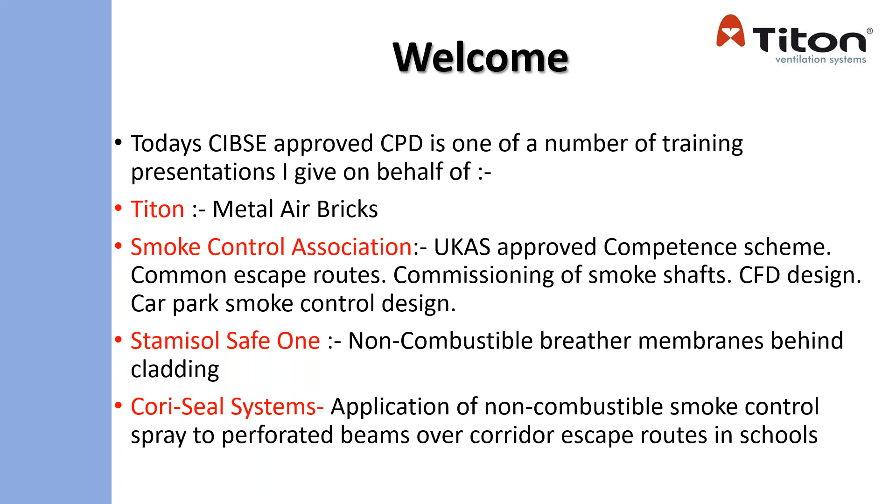Welcome to this CIBSE approved CPD. It is one of a number of training presentations that I give on behalf of companies such as Titon on metal air bricks, which we'll be going through today, the Smoke Control Association, which is on the UKAS approved competence scheme for companies, as mentioned before, one on common escape routes, commissioning of smoke shafts, CFD design, and car park smoke control designs, together with a company called Stamisol on the first non-combustible breather membranes behind cladding, which is obviously a flavour of the day. And finally, there's another one called Cori-Seal Systems, which is the application of non-combustible smoke control spray to the perforated beams that may be over corridor escape routes where smoke plugs have been missed to be fitted. So I do now have a number of these presentations that I'm quite happy to give to the membership if you do the request. Thank you.

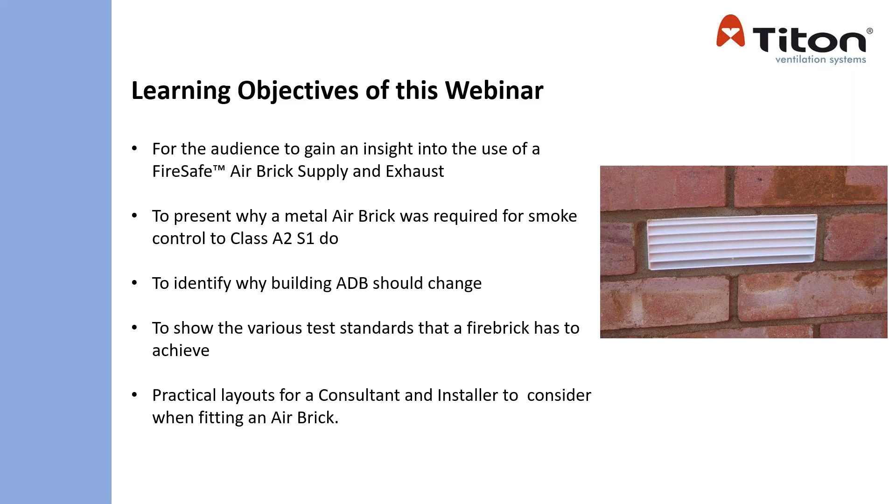So what are we doing today? The learning objective is to give you an insight into the use of metal air bricks over plastic air bricks, at times for both supply and exhaust within a building for various products that are used. And therefore, that's to show why a metal air brick is now required for smoke control to a class A2 S1DO over the plastic scenario. Then to talk about why the building's approved document B should now be changed to actually only specify metal air bricks in buildings. And then I'll show you the various test standards that a fire brick has to go through, and then practical layouts of how the brick to ducting go through and for consideration to be taken place.

So what we're talking about is obviously a new concept in fire safety on the outside of a building rather than on the inside. Therefore, it is no longer acceptable to say, I didn't know, it was too expensive, it was not in the building regs, so I didn't change it, etc.

Dame Judith Hackitt has made it very clear we should be doing the right thing now and not wait for legislation. The lives of residents in buildings must always be considered when designing and developing a building, from the fitting of sprinklers, smoke control systems, fire doors, and fire alarms, all the way down to simple things like the installation of metal air bricks in a cavity wall.

Because any product that has the potential of catching fire can give off toxic smoke and hot droplets, and therefore is not acceptable. It's not just the safety of the building occupants that has to be considered, but also the safety of the fire crews as well.

An outer wall system of brickwork, thermal blocks, membranes, cladding, cavity, and the air brick are all part of what is considered the vertical wall system. Practically, they should achieve what is known as the Class A2 standard from the damp course upwards.

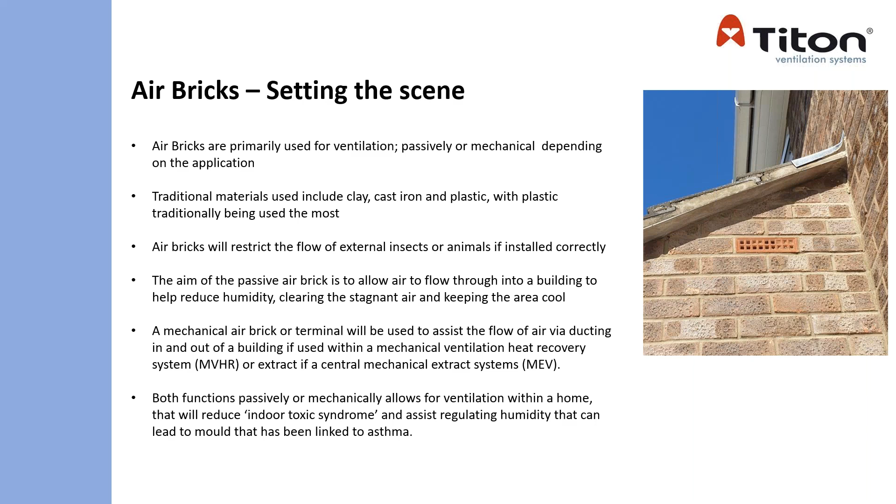So what are air bricks? What is an air brick? And what is its role in the outer wall system?

These are used in conjunction with mechanical vent systems, which require supply and extract terminals through the external facade of the building. Class E, Class F and even Class B are combustible materials, and therefore they can catch fire and give off toxic fumes and hot droplets.

If metal air bricks are made of a metal which is an A1 class, and powder coated for rust protection, then they will meet approved document B and the desire for a Class A2 specification.

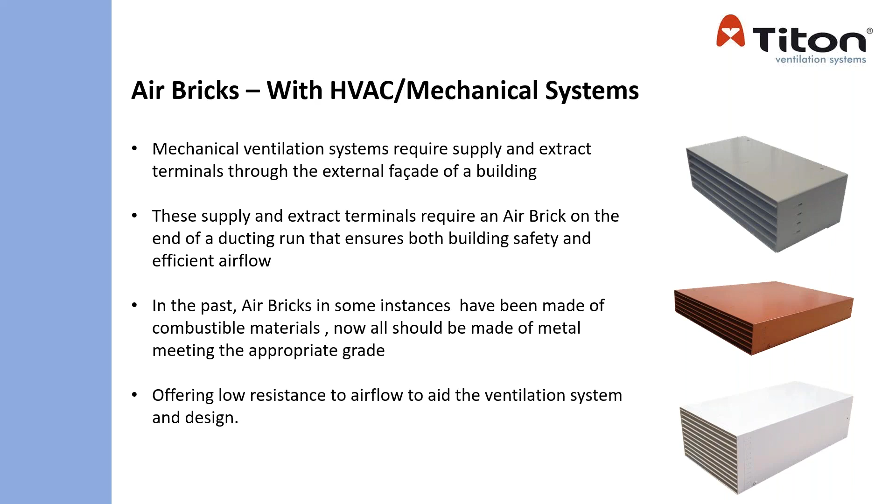Metal air bricks, if designed and manufactured correctly, not only add a fire safety feature to a building, but will also give good, low resistance to the required airflow. Therefore, they can become a positive aid to the ventilation system and the building design.

As mentioned, the development of a metal air brick took place following the Grenfell Tower tragedy, when it became clear that meeting the requirements of approved document B for a Class A2 external wall system was paramount.

The Grenfell fire raised many concerns, especially the importance of fire safety improvements in meeting building regs. Combustible materials that make up the external fabric of a building, such as an air brick, would, after the Dame Judith Hackitt report, have to be redesigned with a change of class.

This is because low price products which are combustible should no longer be the driver in pricing. This should always be about life safety.

That could imply that a product classed as combustible could still be allowed to be installed into certain building heights and therefore still fitted to the outside of the building. So that raises questions about improving safety at lower heights for any building where people occupy premises day and night.

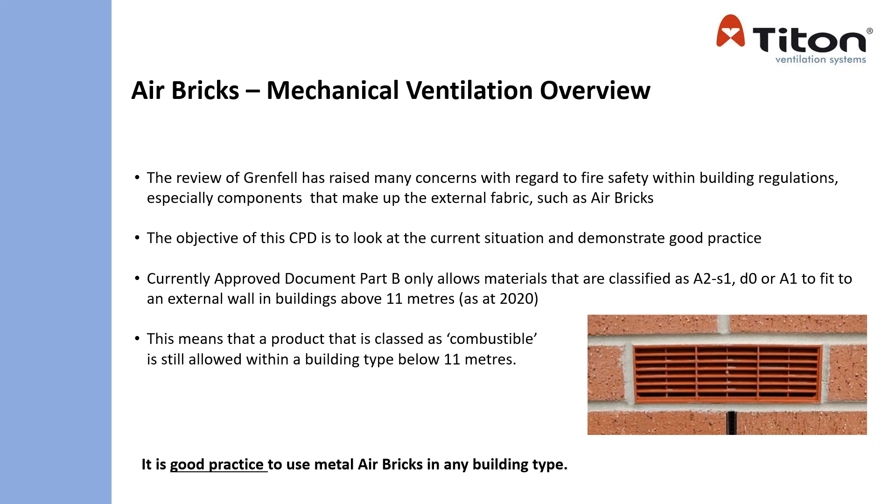The current building regs for high-rise buildings still consider building heights of 18 metres and above, and this is being reviewed for safety structures, the different products, and the different buildings.

The Right Honourable Robert Jenrick, Secretary of State, has stated that the height should be considered to be changed from 18 metres to 11 metres when we consider the reaction of fire on the external surfaces of walls.

And now we all know that it's certainly being changed with consideration for sprinklers, and we also know that an external wall system should meet a Class A2, with less exemption.

Now we'll show you some pictures about plastic and how the impact on building safety, when ignited, can contribute to the fire with toxic fumes via the wall cavity.

It is current practice that an air brick used below 11 metres can be of plastic or combustible material. A number of care homes actually have combustible air bricks fitted above the damp course at various floor levels for the airflow of an MVHR.

Air bricks fitted into a building higher than 18 metres - and in mainland Europe it's 11 metres - is considered the norm and should be part of an A2 classification. This is a position that shouldn't be ignored or misunderstood. A2 air bricks are available and should be considered for fitting in any wall system.

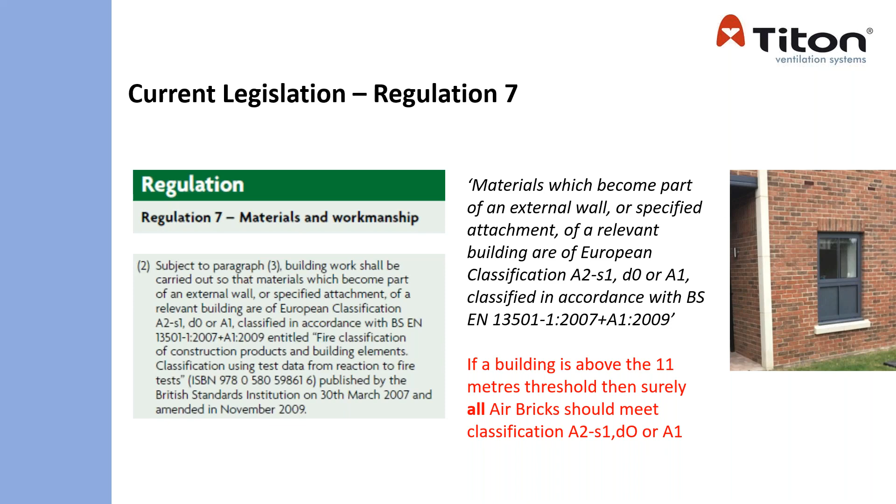A class E can still be made available, which is combustible, and therefore is a problem when it could come to the A1 for fire, S1 for smoke, and D for hot droplets.

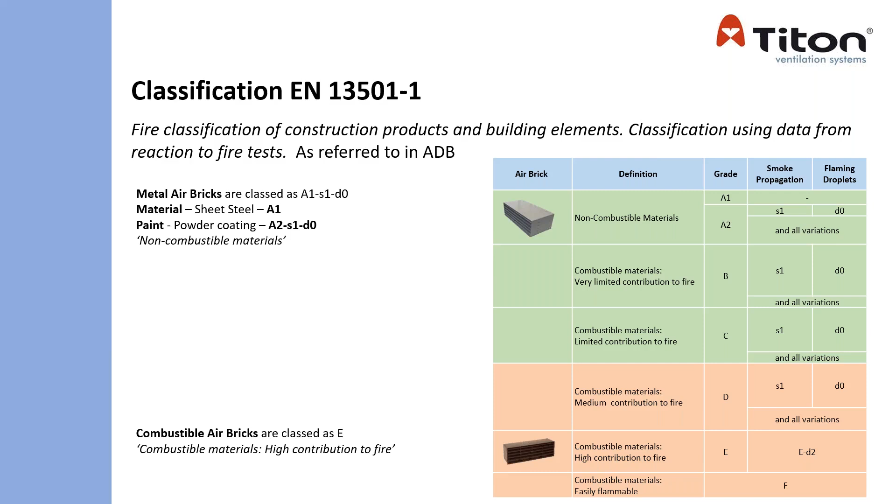Dr. Jim Glockling of the FPA carried out fire tests on plastic air bricks, demonstrating how quickly one of these plastic vents can catch fire, using nothing more than a cigarette lighter. Between 3 to 5 seconds the vent was alight.

Once alight, we end up with toxic fumes, fire, and hot droplets, which can all be pulled into the external part of the building or end up developing elsewhere along the building itself. This can be caused by the chimney stack effect of smoke being drawn through.

This can create a fire in other parts of the building. It can result in smoke logging of internal rooms, and therefore could impact upon the means of escape for people in buildings, and give visibility problems for the fire crews.

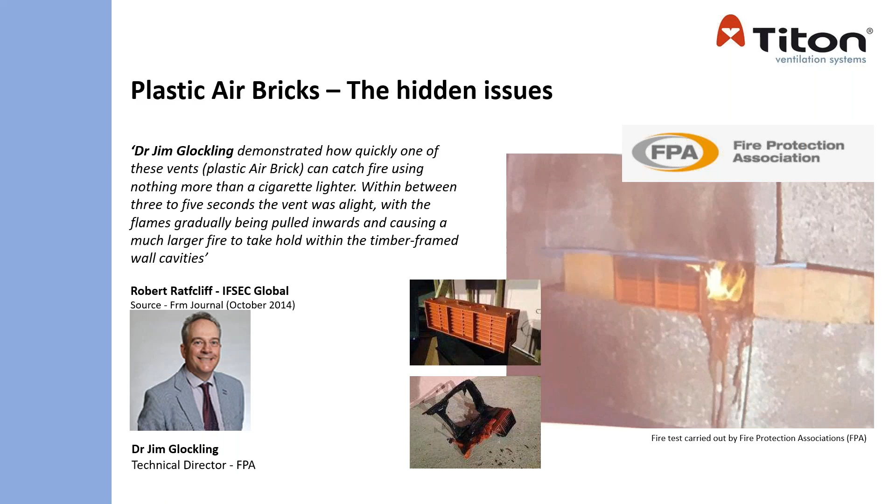The likelihood of a fire actually starting from an air brick is small, but quite frankly, that should not be a reason not to fit metal air bricks.

This chart was released by the Home Office in 2019, demonstrating the current fire-related fatalities. From 2011 to 2019, there hasn't been a decrease in deaths, but a continued trend of between 250 to 300 fatalities per year.

One death is obviously one death too many, no matter what the concern. There are many factors that can contribute to a death in a building, and many products that could actually contribute to it as well. But what we're saying is that we should consider a metal air brick.

We should always ask the question: are we fitting it? Has it been fitted? And is it fit for purpose?

The Ministry of Housing and Communities, local government health and safety departments, and a number of Dame Judith Hackitt's working groups are constantly looking into the causes of fires with the fire authorities. From this, they will continue to propose updated regulations with guidance in support of building safety. As we keep emphasising, safety comes first with any building design where people are present.

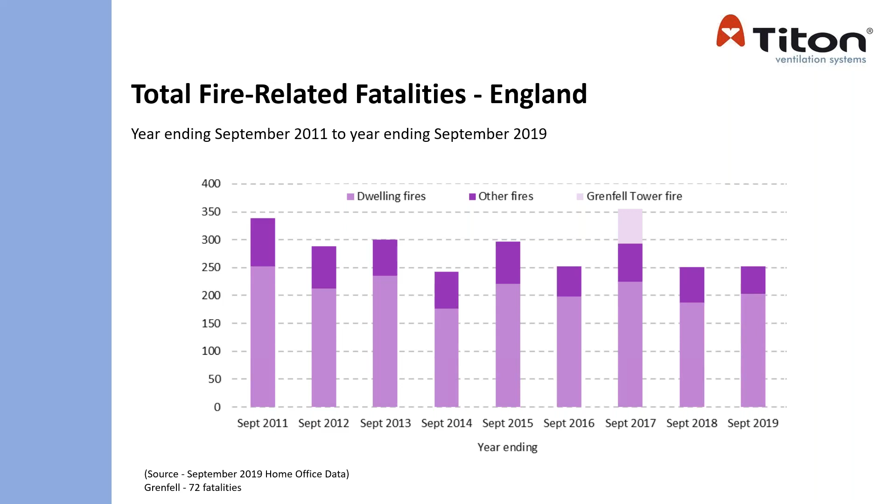This graph shows the Home Office statistics relating to the inhalation of smoke. Of over 163,339 fires a year, that is staggering, as any fire can mean death.

In 2019, that related to 252 deaths, with over 3,000 hospital treatments from smoke inhalation. In a fire, smoke is the biggest danger, and over 50% of deaths relate to smoke inhalation.

Now, we've still got a long way to go to get the building regulations changed, to change safety, because it's actually over 3 years now since Grenfell, and discussions and changes continue to take place.

There is a figure of over 2,000 buildings suggested that will need recladding, with over 352 already identified. So you then question, with these numbers of buildings, what other ignition products are fitted and have been installed.

So we always say that the building industry needs further improvement measures put in place, and metal air bricks will help contribute towards building safety.

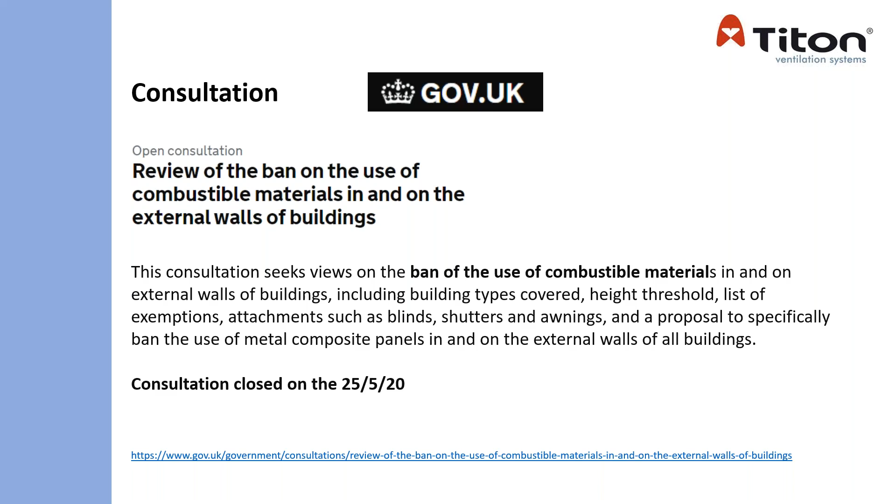Earlier last year, the MHCLG opened a consultation questionnaire for consideration. They asked companies and organisations for their proposed changes to Approved Document B, and their reasons. This consultation is now closed and still being reviewed to decide what materials can be exempt from being Class A2 and what ones should now be removed. As Titon, a manufacturer of metal air bricks, we have requested via this questionnaire that air bricks should be one of the considerations to have removed from non-combustible materials being exempt.

We have seen the current situation and shown the independent study of a development fire test by the FPA, and we've heard some of the views from prominent people in the building industry. It is unfortunate that metal air bricks are not being fitted, but there is an improvement and an increase now on metal air bricks being asked for in the building types.

So we ask ourselves, is it sensible to continue to use an air brick with combustible materials? The answer to that is not really. Price should never be a driver over saving lives.

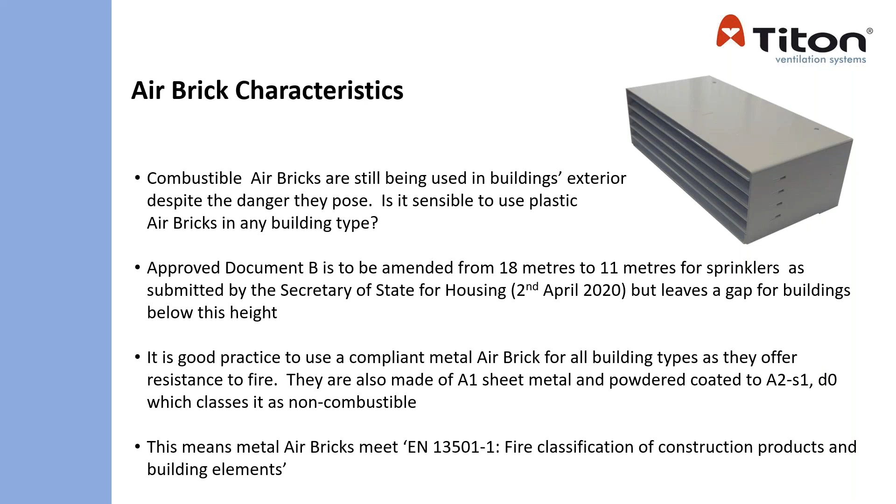We've seen and confirmed that products currently exempt from being Class A2 in an external wall are now under review. Therefore, it makes good practice to use a metal air brick for all building types, as they offer resistance to fire, smoke and hot droplets. Being made of metal with a powder coating makes them part of a non-combustible outer wall system, and the metal air brick itself will meet the EN 13501 Part 1 fire classification standard.

So, what makes a metal air brick? Well, they should be A2 compliant with the external wall system. Building designers should ask themselves: is the air brick I'm specifying resistant to fire? What materials is it constructed from?

If it's made of plastic, we know it's combustible. If it's metal, we know it's not. When they're metal, they're A1, but when we add the powder coating, that gives an A2 classification, meaning a limited combustibility characteristic.

Another question a builder and an owner would ask: is the product corrosion resistant? Has it got a test certificate to ISO 9227-2012? Is it rated to EN 1670? Has it got a performance test certificate which offers low air resistance and therefore good airflow? And what size of air brick would I need within my building?

These are all questions that the building owner, the building designer and the builder should be asking themselves. The good thing is that a metal air brick can be easily connected to common internal duct sizes for any high-rise or residential building.

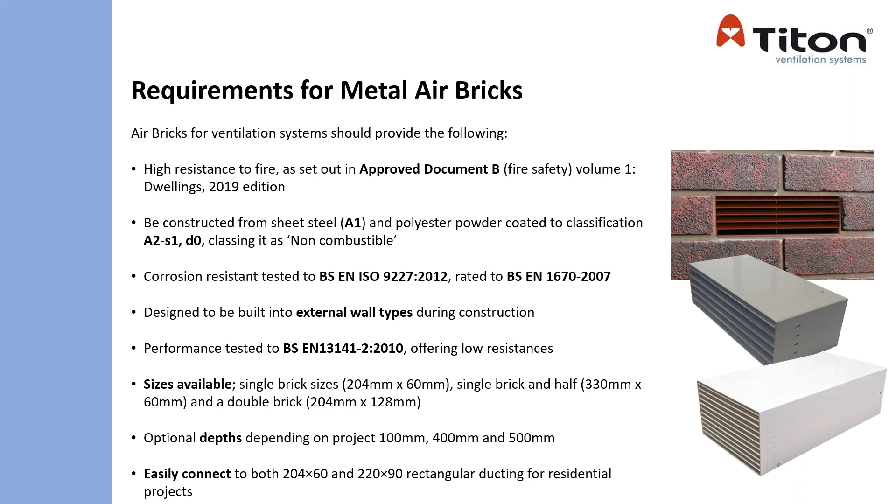If it is an inferior air brick without an ISO test or an EN quality standard, it can cause air resistance that affects your energy recovery unit, creating inadequate ventilation. Has it got possible acoustic issues that could create uncomfortable noise levels? And if it's an incorrect design, it could lead to having to install a larger MVHR to allow the correct airflow.

So an air brick, although a simple product, has various implications it has to go through to ensure it meets the specification it should be designed for with the products that surround it.

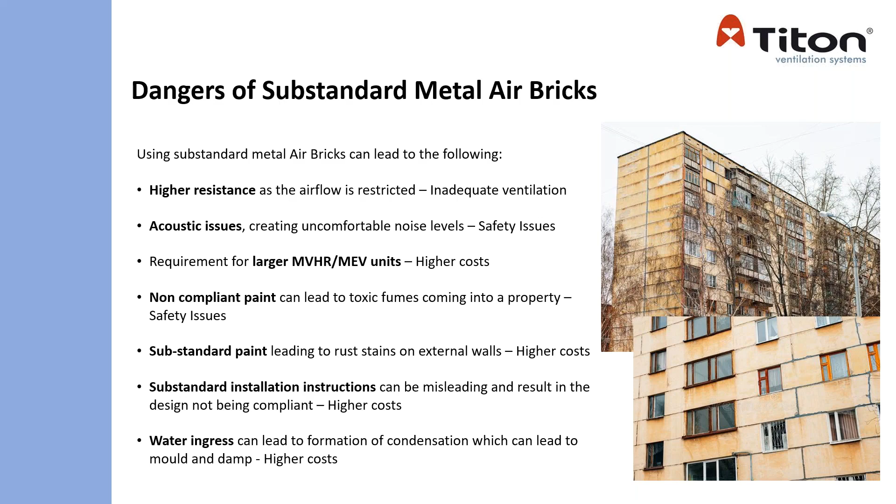We recommend that certificates of performance, or declarations of performance, should be made available from the air brick supplier to give confidence in the supplier and as part of the product portfolio for building owners. A building owner has a number of certificates that he should have made available to him.

It includes performance test certificates, that it meets its supply and exhaust for a powered ventilation system. Its corrosion resistance certificates. It has a steel supply certificate to meet a Class A1 or an A2. It is manufactured, it's powder coated, and it has the manufacturer's certificate of ISO 9001.

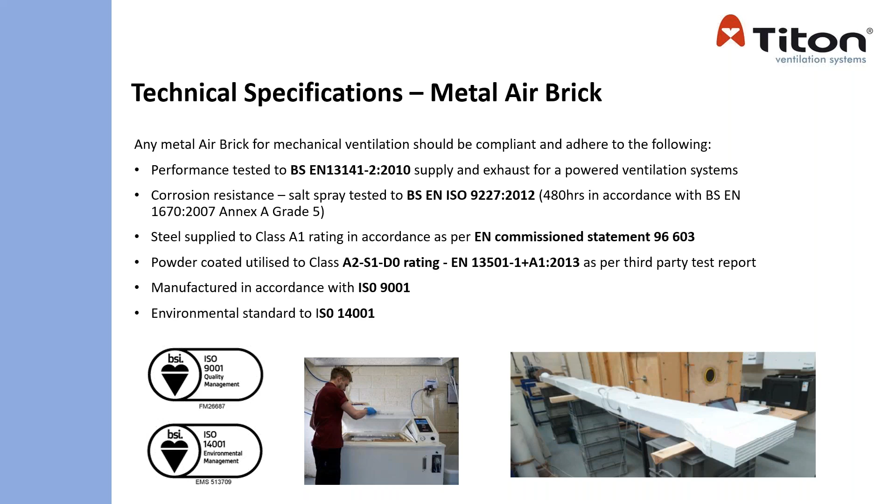So where do we see the different types of application of the air brick being used? Well, we know that they're used in a number of houses for domestic uses, care homes, apartment blocks, student accommodation, and even high-rise apartments. In fact, any building where air movement, either passive or mechanical, is needed to draw air out or put air into a building is needed to meet these requirements for an air brick.

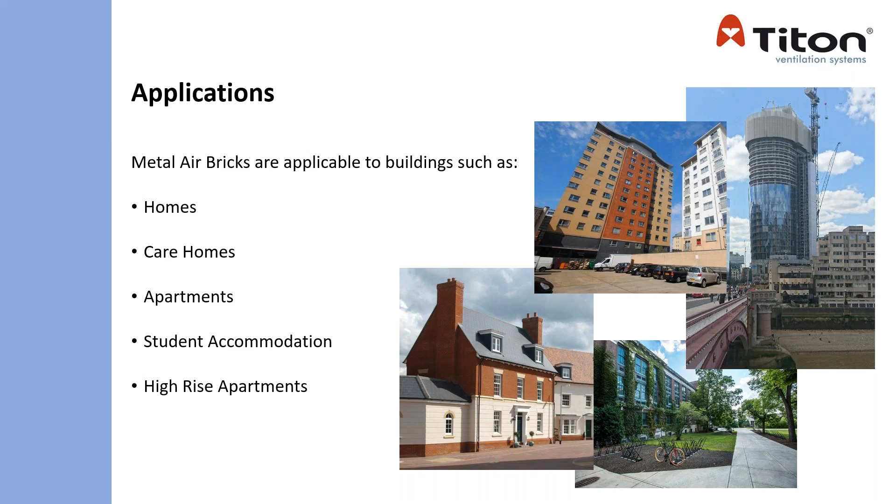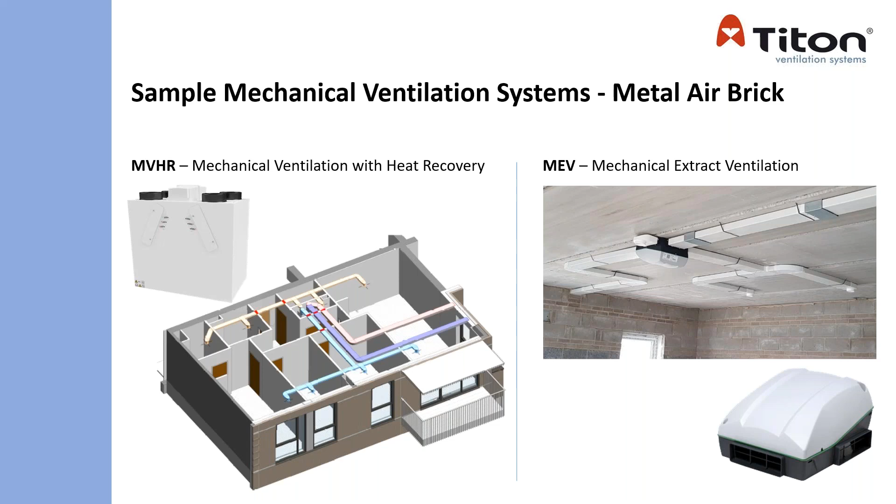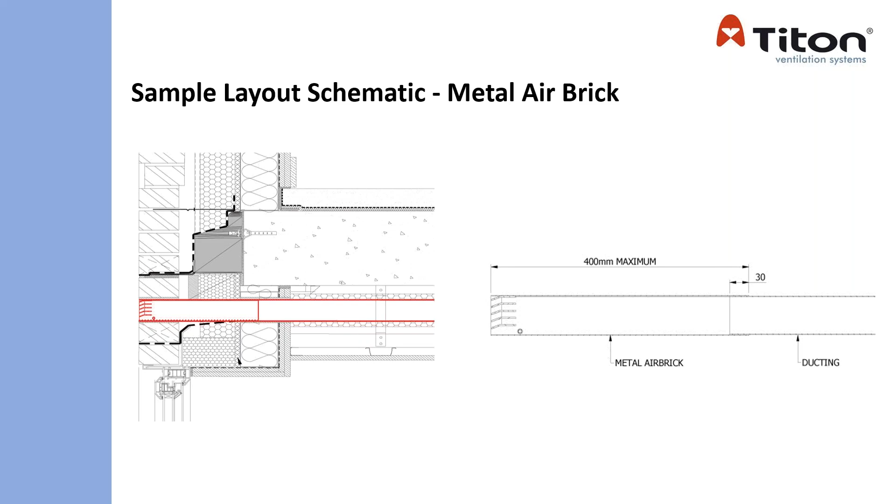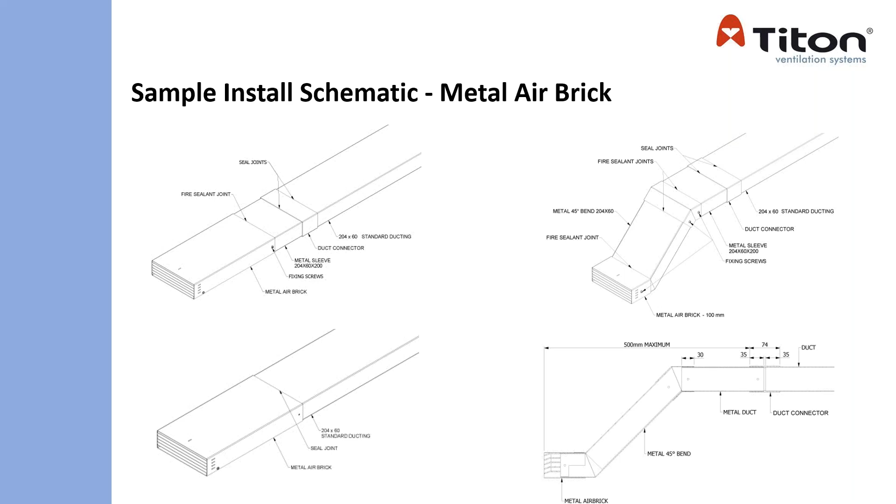Because we then ask ourselves, what's behind the air cavity? Is it a cavity vent only? Could there be combustible ducting, inappropriate air gaps through the wall cavity? So this could be a disaster waiting to happen. A version with external cladding instead of brickwork allows the product to be installed through a variety of different building skins.

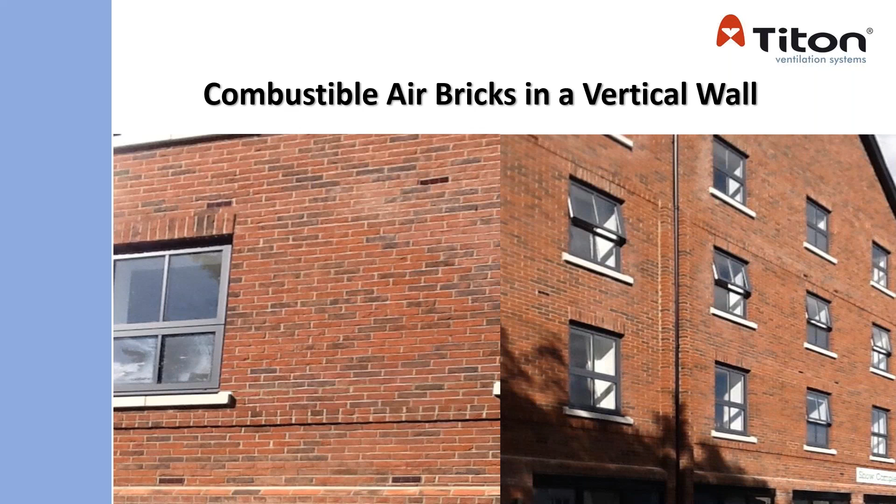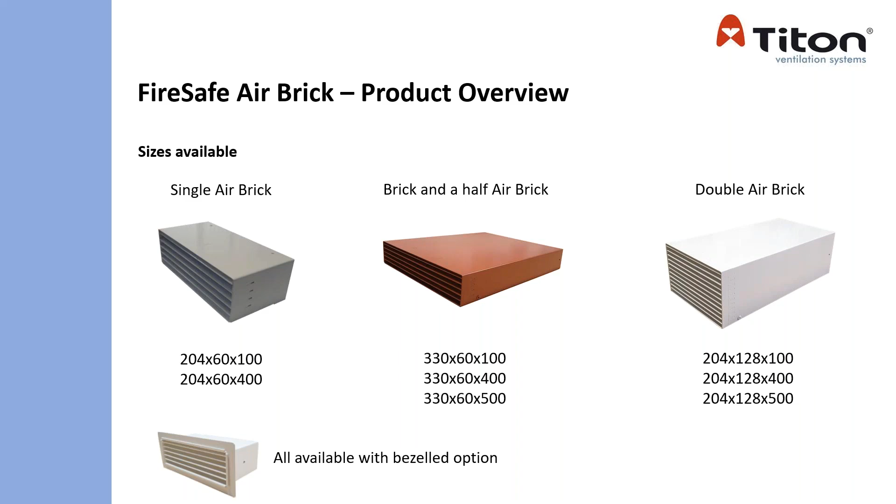And here it shows you the different types of air brick that are available at different widths and different types. But all these air bricks are now available as metal rather than plastic. There is a full range of accessories now available for a builder, so he's got no excuse to say, well, I could go for a metal air brick, but I haven't got the attachment pieces that go with it. All these are available that will go through the cavity and fix to the internal ductwork within a system.

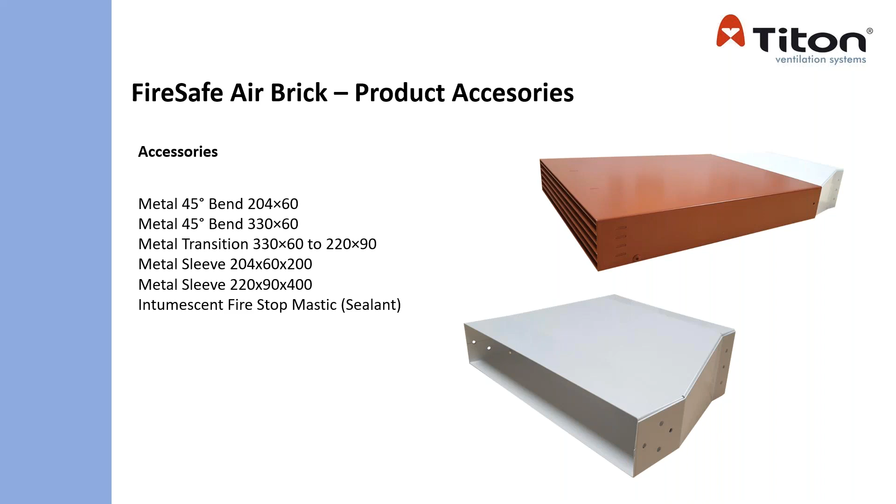So you ask yourself, would this really, and should this, have passed a building inspector? Was this a design spec, or did the builder put it in there as his own signature? Is it really competent? Did it comply? So sometimes you ask yourself, you get what you pay for.

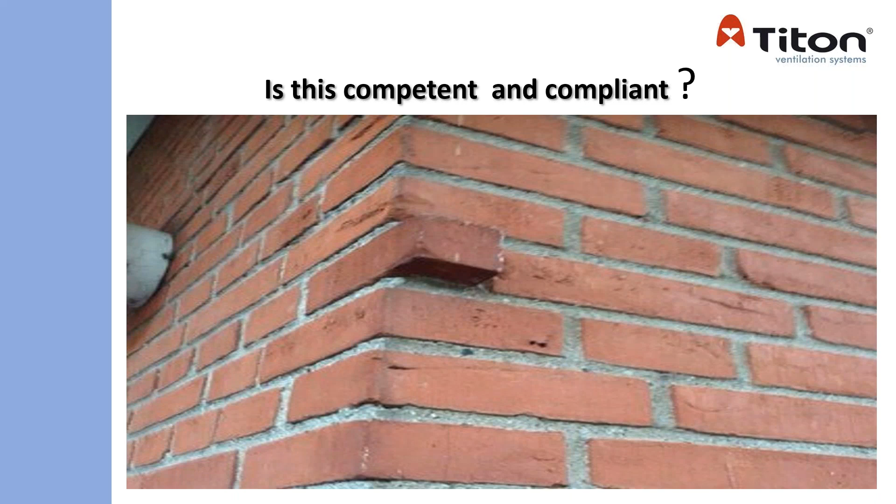So post Grenfell tragedy, fire safety questions continue to be raised relating to building designs and the products used to support the safety of occupants. Approved Document B continues to be updated as new products become available. And part of my role is to ensure that everybody knows and understands the changes in the availability of non-combustible products that are now coming out into the industry. Products that are used both externally and internally, if they're not Class A2, are being questioned as technology progresses.

Any building, as mentioned, where people live and work, no matter what the building height, is being investigated for building safety. So we say that because there's been no major fire from a combustible air brick, but does it make them really fit for purpose?

So I would recommend that metal air bricks should be fitted to any building where air is drawn in or extracted out via the building cavity, as the safety of building occupants must not be jeopardised, and any area where we can contribute to fire control must be looked at.

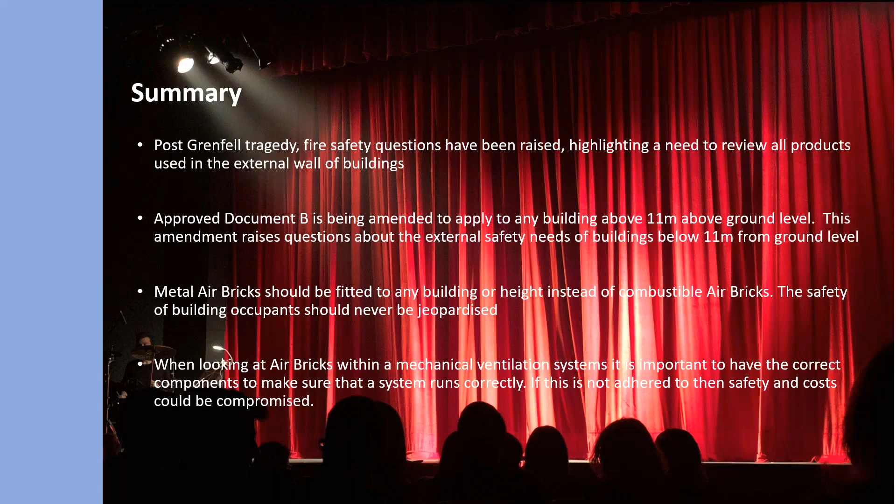Finally, taking the point about what is right and what is wrong, on the 20th of July 2020, the Ministry of Housing and Community issued its draft building safety bill. And the key point is for companies linked to the building safety industry. There is a potential for a 2-year prison sentence for those persons proved not to be considering building safety. So one always asks themselves, we should always be doing the right thing at the right time.

And recently, we know that the BSI have introduced what is considered to be the BSI Flex 8670 for competence of individual builders, as well as the Smoke Control Association's competence for whole building system design. So this is being reviewed, and with BSI and UKAS and the Ministry of Housing and the 12 working groups, building safety is becoming a paramount condition of what occurs.